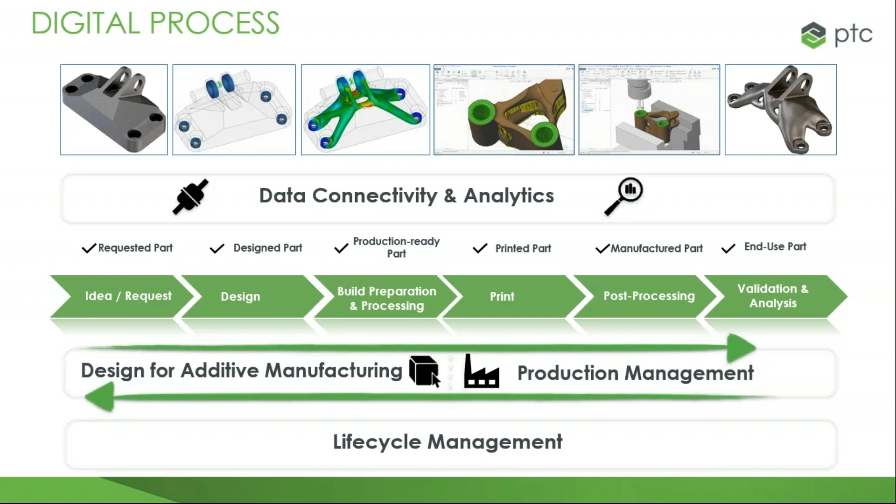Vores additive manufacturing proces, den vil vi gerne gribe og bære og holde hele vejen igennem. Og det går fra idé til design, til at lave forberedelse til printning, at man printer, at man postprocesserer, og at man analyserer og validerer de produkter, der kommer ud. Og PTC har en strategi, som siger, at alle 6 områder skal ligge i vores produktportefølje, og det er det, vi gerne vil have. Så når vi tager design og hele produktet, så vil vi kunne have hele lifecycle management og produktionen i vores systemer. Og der skal være datakonnektivitet frem og tilbage. Det er målet.

For at kunne understøtte det mål, så har vi selvfølgelig nogle produkter, og Creo kommer til at tage den generelle fremstilling af additive manufacturing produkterne. Vi kommer til at kunne lave en assembly tray, vi vil kunne lave topology optimization og generative design, og vi vil kunne lave en masse ribber, avancerede ribber. Vi vil kunne lave B-rep, præsentation af vores emner, altså rigtig geometri, som vi vil kunne printe.

Vores Windchill vil kunne tage vores print assembly, vores samling af det, der er på vores printplade, og kunne gemme det som en assembly, hvor der også er processeringsdata via vores Materialise samarbejde. Og så vil vi bruge ThingWorx til at overvåge produktionen med, og man vil kunne gennem ThingWorx få en forbindelse til de additive maskiner, der findes ude i produktionen, og kunne se, hvordan de kører. Og det vil man kunne lave dashboards på.

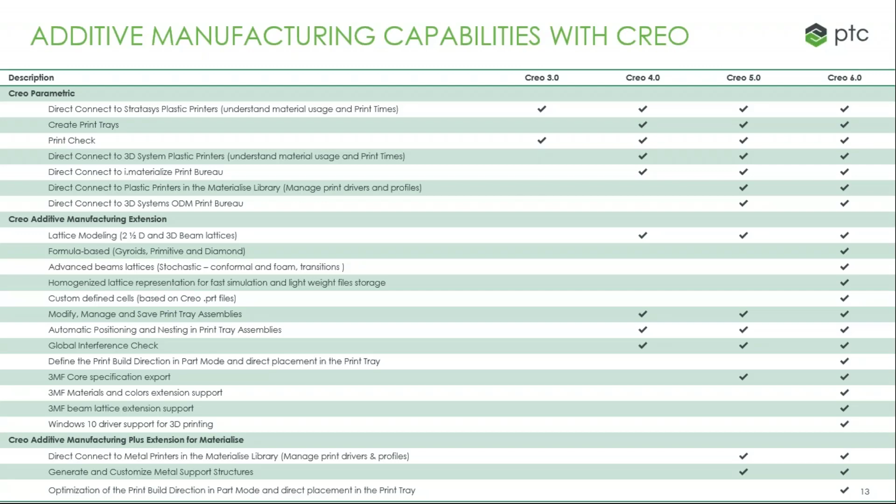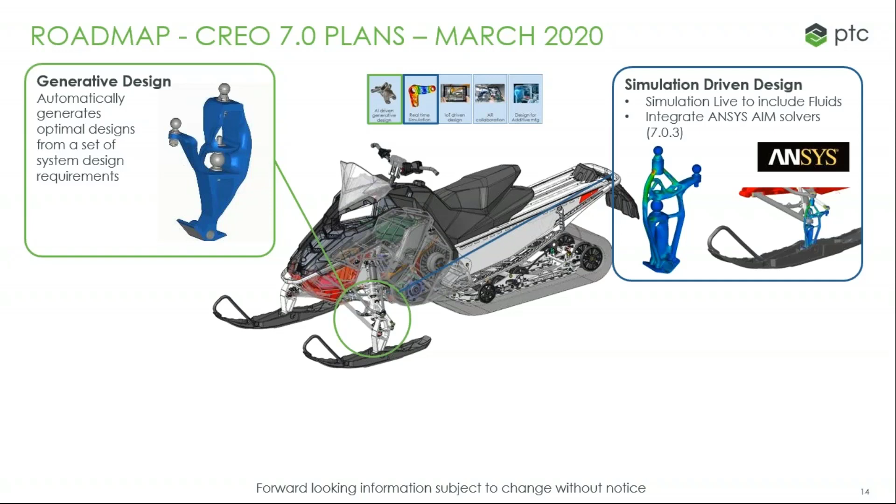Når vi kigger på, hvad der er og kommer i 7, så er et af de områder, som Additive Manufacturing også vil tage sig af, og som fundament, det er generative design, som sådan nogle muligheder for at printe nye ting, der ikke er ligesom de plejer at være, let og stærkere. Det er et af områderne, vi kan gøre meget ved.

Så har vi Additive Manufacturing som et af vores hovedområder i 7, og det sidste hovedområde, det er generel opdatering af Creo, hvor et af de hovedpunkter, vi skal lægge mærke til, det er multibody design.

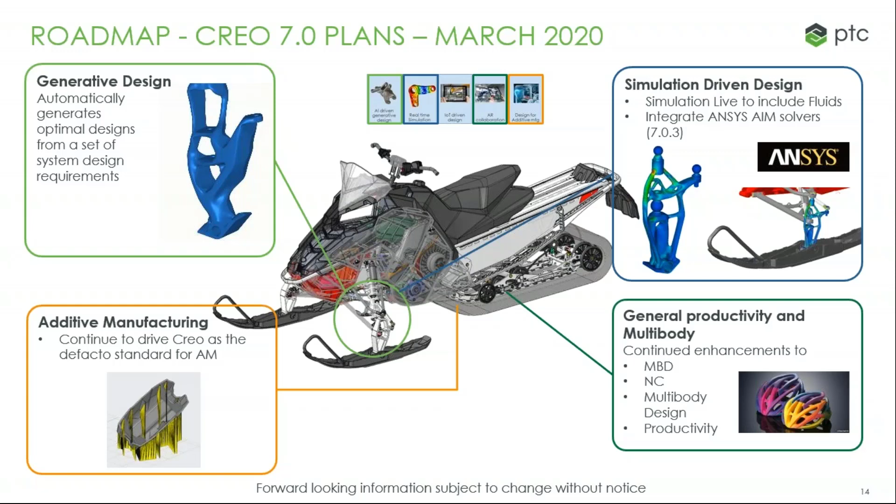Multibody design er vigtigt i vores print Additive Manufacturing sammenhæng, fordi vi i det har mulighed for at lægge flere emner sammen, og dermed printe dem som et. Vi har mulighed for, når vi har lagt emnerne sammen, at udhule dem og fylde dem op med ribber. Og det er et område, som også har krævet rigtig meget udviklingstid. At kunne tage 3, 4, 5 emner, smelte dem sammen, og så fra det punkt af køre videre med dem som et emne. Det har taget lidt tid.

Af de ting, der kommer i 7, havde jeg tænkt mig at fremhæve det her, og det er de stokastiske lattices, som nu er blevet optimeret således, at de genkender kanter på emnerne. Det er også et vigtigt område for at kunne printe 3D.

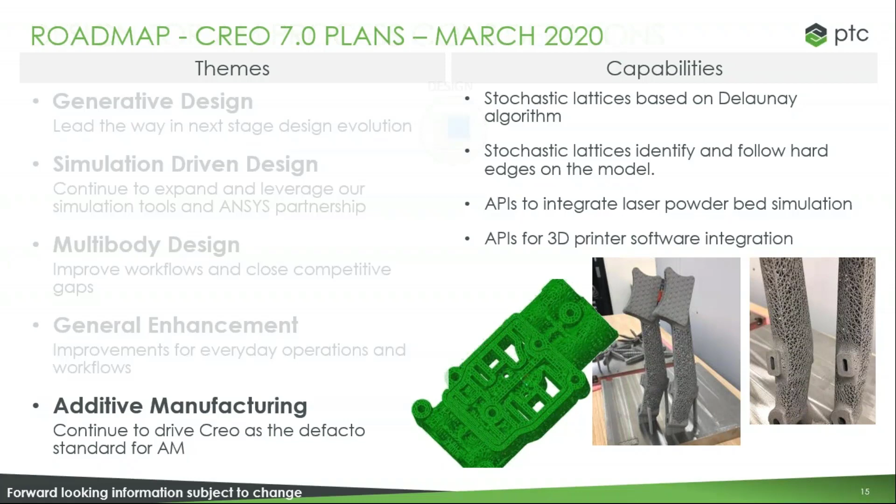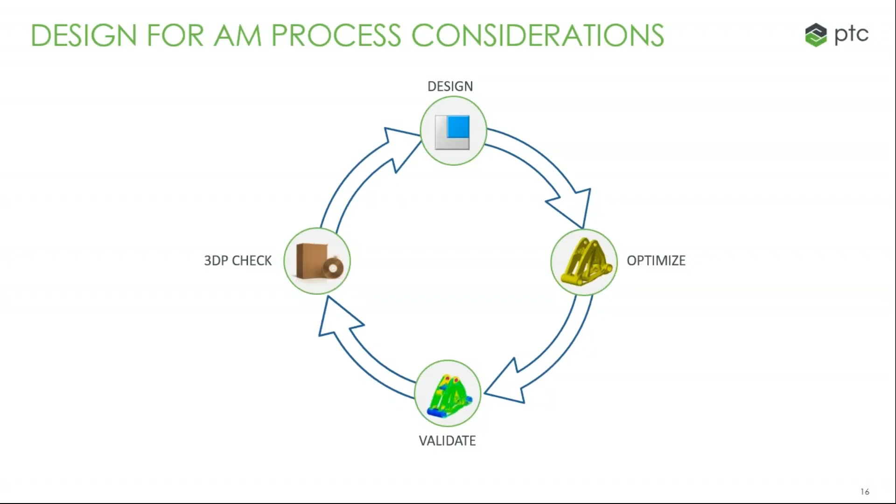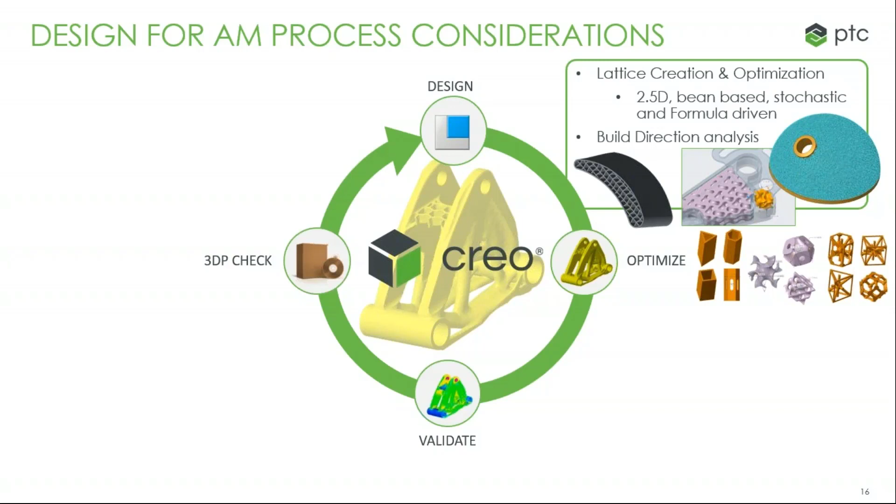Og til slut her, før min tid løber ud, så har man normalt skulle have 4 forskellige produkter inde i sit forløb for at kunne printe noget i sin 3D-printer. Det behøver man ikke mere, fordi vi har et produkt, og vi har Creo, som tager alle de 4 områder. Først og fremmest design med alle de interne afstivninger. Det kan være 3D, det kan være 2,5D, det kan være stokastisk, eller hvad det er. Det findes alle sammen i Creo.

Derudover så kan vi topology optimisere eller generative design optimisere vores produkter, også i Creo. Vi kan validere dem, vi kan placere dem på vores printing tray, og vi kan næste dem i vores printing tray. Vi kan lave, og det her det er vigtigt, vi kan lave en print tray assembly, som man kan store i Windchill, og så genkalde sådan, så man kan lave nøjagtigt den samme produkt en gang til, når man har printet det en gang.

Og så til slut, vi arbejder som sagt sammen med Materialise. Materialise har de fleste driver til de fleste 3D-printere, og det er derfor, vi har valgt dem som samarbejdspartner.

And with this, Paul, great. Are you ready? I'll make sure that Paul gets the presenting rights. Thank you, Michael. You were bang on time here. That's nice. I have a watch going so I could see how much time I spent. And Paul, you should be presenter by now.

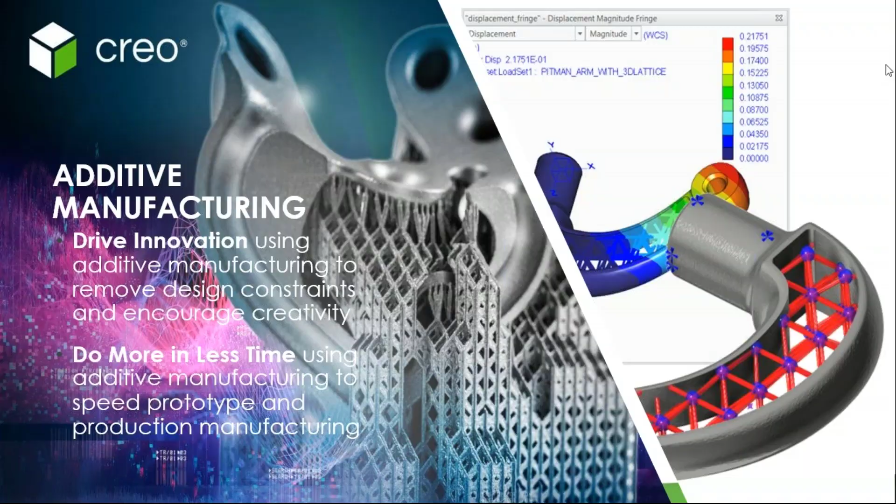So, can you see my screen? Yes, the floor is yours. Perfect. Let me just remove this. Okay, good.

I just saw that Michael talked a lot about Creo capabilities, but I'm going to add more information on top of that. So I want to talk about the tools that are available in Creo to address the challenges of additive manufacturing, and I will also talk a bit about generative design, what's coming in Creo 7. So this agenda will be divided into 4 sections.

I will start by talking quickly about the PTC strategy for additive manufacturing, and then I will talk about our ability to design lattice structures, typically used to lighten parts while maintaining a certain stiffness. And you will see that we can not only build these structures, but we can also simulate the behavior of these parts via structural calculation, modal, and thermal analysis, for example.

We'll also talk about print preparation and print connectivity with the Materialise integration. So we have a really strong connectivity with certain types of printers, with certain manufacturers. For example, we have a high-level conversation with these printers. We can print directly from Creo. We have information that comes directly from the printer, and we can leverage this.

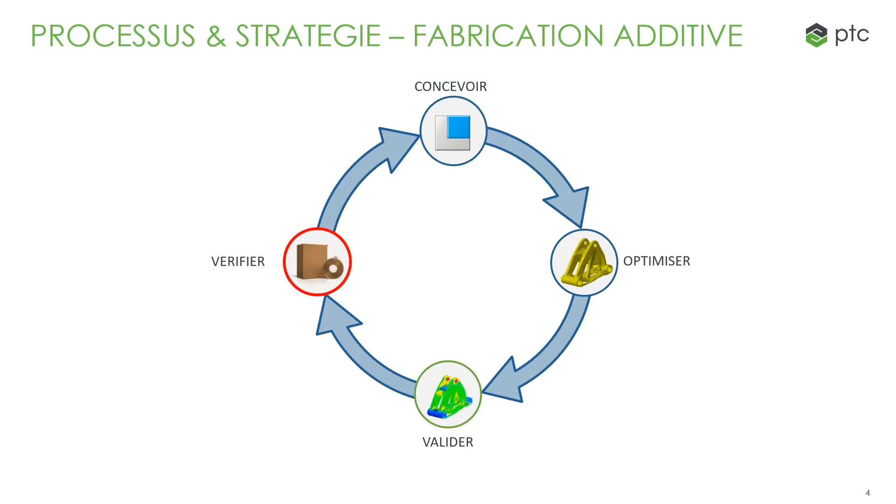So PTC's strategy is really to avoid this break in the digital chain by developing tools to optimize this process. The idea is really to enable you to design, to optimize, to validate, and to verify the printability of the models directly within Creo, without ever leaving your Creo session, and all this in an associative way.

So in terms of lattice modeling, we have libraries of predefined shapes. You can imagine, for example, a massive part like the one you can see on the right here, where you're going to define some areas that you are going to fill with lattices. The typical use case is to reduce the mass while keeping the part strong. And depending on how the part is loaded, you can choose different types of lattices.

Michael already talked about this, but you have 2.5D lattices, you have 3D lattices like the one you can see here. We are also supporting advanced lattices, like formula-driven lattices, which provide high stiffness and low maximum stress compared to other cell types. We have stochastic lattices, and you can even create your own lattices in Creo. So you really have flexibility here on how you want to define your designs.

And all this, and this is I think the most important point here, is B-rep geometry. So it's not faceted geometry, it's not approximated geometry. We have accurate mass properties, and this is really important. You just need a simple feature to create this parametric geometry. And you have the whole control here.

You can define any configuration that you want. You can say, for example, I want it to be hexagonal, I want it to be rectangular, I want it to be triangular, I want to change the cell size, I want to add a round radius, I want to add drain holes. You can really do whatever you want here. Same thing for the 3D lattices, you can say I want to remove inner horizontal beams, inner vertical beams. So you can really play with this and investigate many different ideas really quickly.

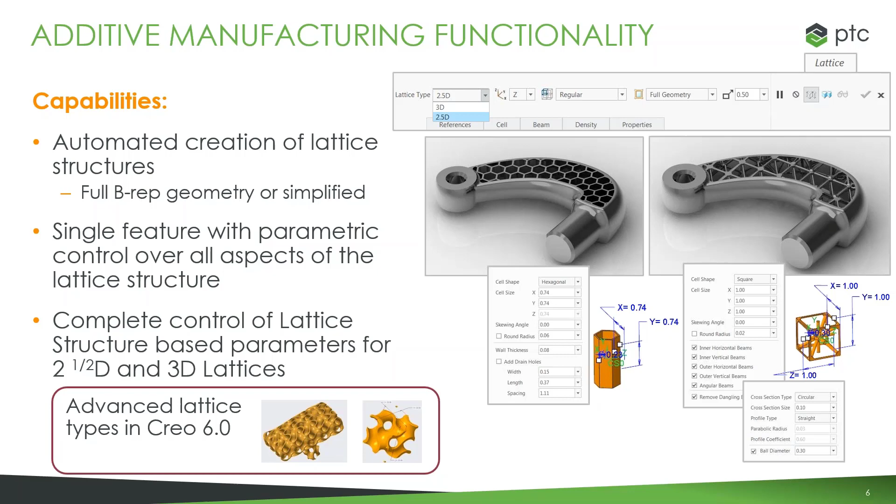And it's not mentioned in the slide, but of course, as this cell is parametric, you can use these parameters as optimization variables. So you can optimize this part. You can say, for example, I want to take this part, reduce the stress, define the maximum displacement of a certain value, avoid certain frequencies, and my goal is to reduce the mass. And you're going to use another tool that we have, called BMX, Behavioral Modeling Extension, and it will take all this information and find you the best possible result, meeting all your design requirements, and of course reducing the mass, for example.

So that's really good to be able to create these lattices, but it's even more important to calculate those. And there is a lot of tools in Creo to do that. We have Creo Simulate, which is our historical simulation tool. We have Creo Simulation Live that can also do the job, which is a new tool. We'll see that in a moment in the demonstration.

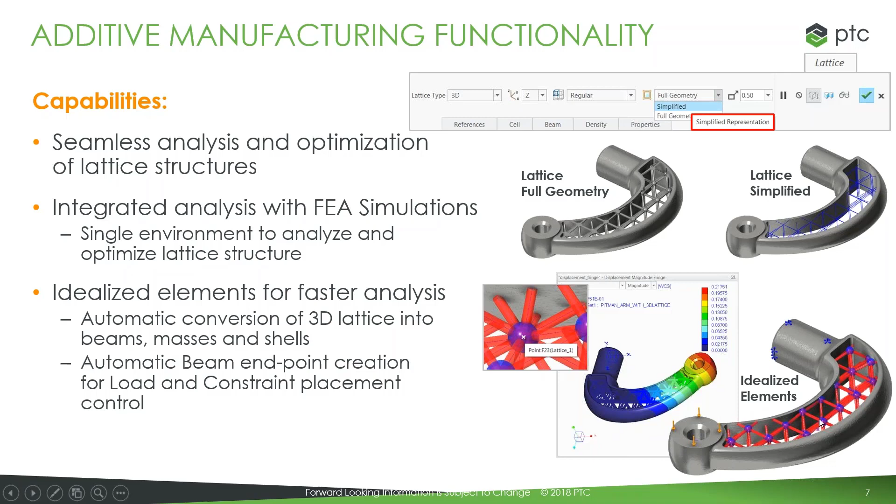The point is that even on dense lattices that you cannot represent in direct geometry or exact geometry, for the sake of precision or for the sake of performance, you're still able to do simulation thanks to the idealization capabilities, what you can see on the bottom, that are integrated into Creo. So you can basically simulate any type of lattices that you want.

We provide functionality to enable printer tray optimization. In Creo, we have a specific type of assembly that enables you to position components either manually or automatically, or to do what we call nesting, which automatically configures the component placement to best utilize the tray volume and maximize printing efficiency. All the information you need to print - the models, the assembly, rotations, materials, colors, and so on - is stored in this assembly, and you can reuse it to make your process repeatable for final production parts.

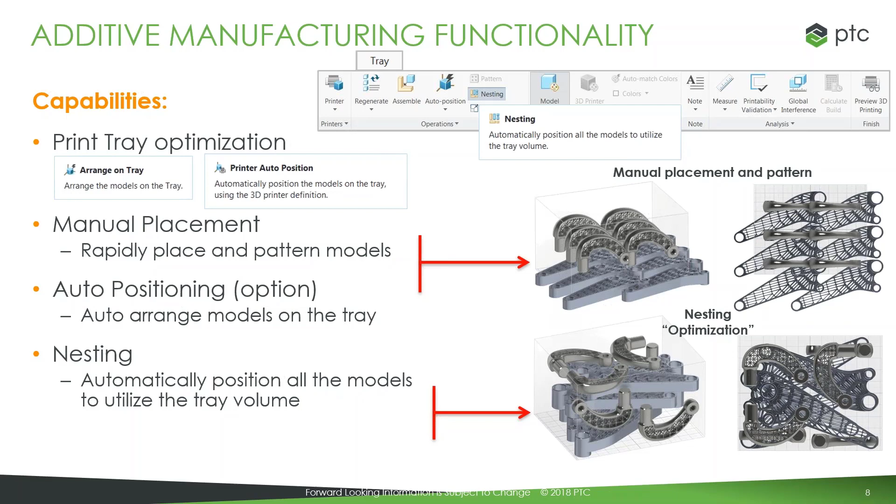You already saw this just before, but in Creo 6 we introduced a new type of analysis called the build direction analysis. What it does, as you can see, is identify via a color code all the areas that will need support according to the critical angles you've defined, based on your machine.

Not only can the system display these support areas, but you're also able to optimize the orientation of the part, for example to minimize the support, minimize the print time, or even maximize the capacity of a print tray. You have all these options here. And of course, the result of the analysis is a new orientation of the part that will automatically be used in the print tray at the end to position your components.

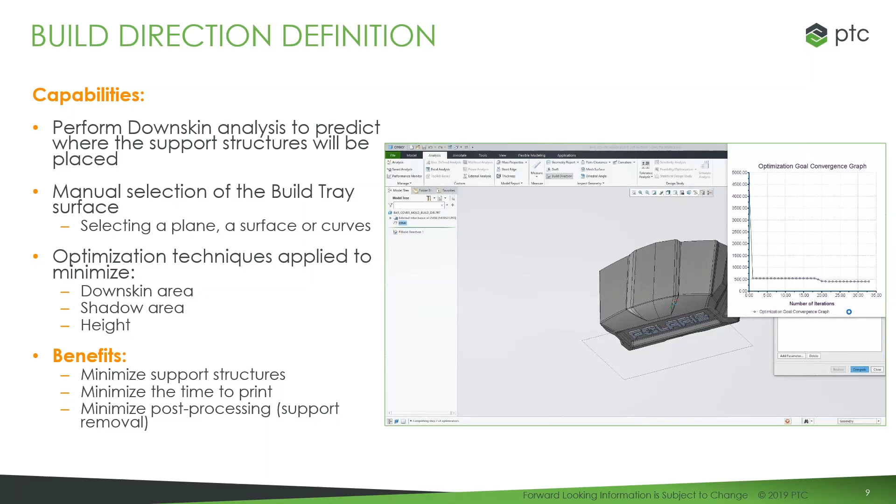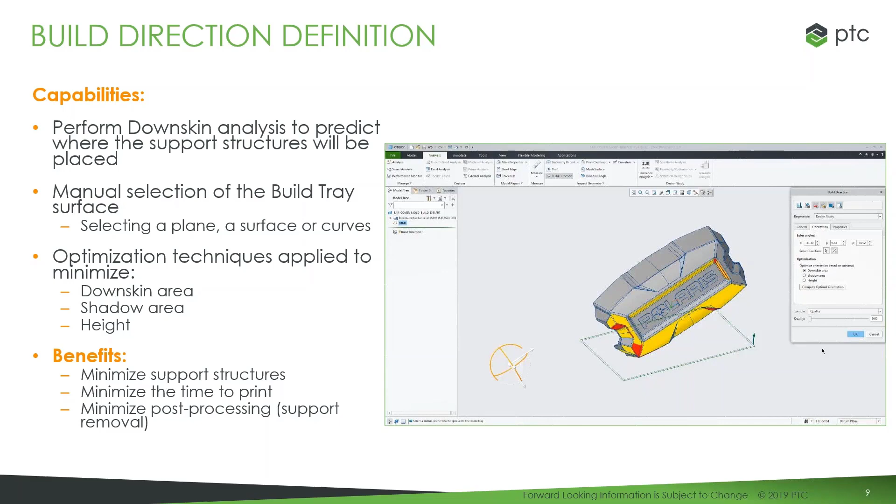Right now you can see the system iterating until it finds the optimized orientation. When you close that, you can see the orientation it finds is the best orientation to minimize the support in this case. And you can reuse this later on in the tray assembly.

So let's talk about the Materialise integration quickly. We have a partnership with Materialise. For those who don't know, Materialise has been around for a while and developed a lot of functionality specific for metal printing. They have a lot of experience, and we basically brought this experience into Creo, into two components.

The first is called the Build Processor Framework, which is a connective feature to connect Creo with machines, the metal printers for example. It's really similar to what we have in Windows: the Build Processor Framework is the printer manager, but there's no printer driver by default - you need to get a printer driver if you want to print directly from Creo.

This connectivity feature enables you to extend your connectivity to more than 70% of the printers in the market, so you can basically connect to any printer in the market. We have a list we can provide at the end of the presentation.

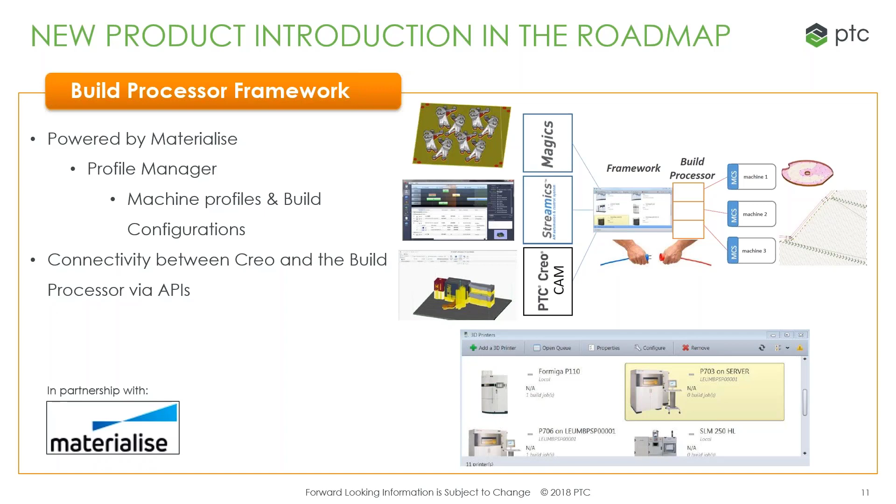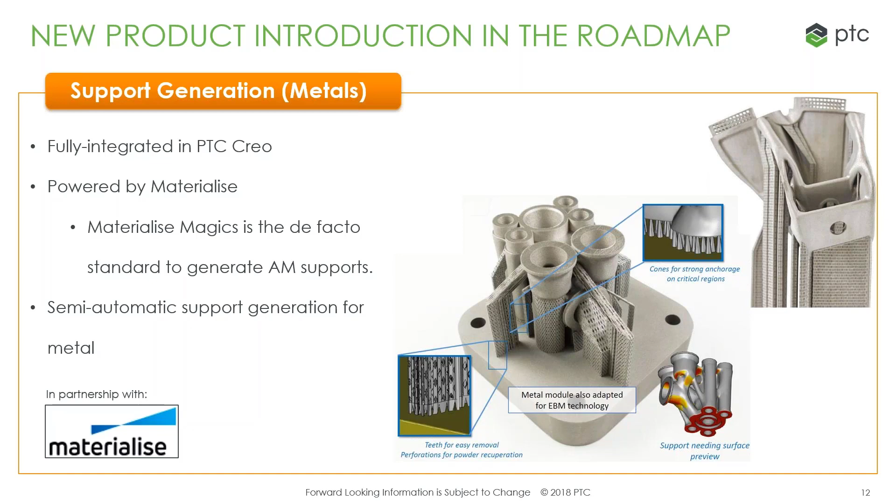The second component we brought into Creo is what we call the Magics SG Plus kernel. Today it's the leading tool in the market for generating support structures, and it enables you to generate the exact geometry of a support according to the printer you've chosen. We have total associativity between the support and the part, so if your part changes, or the position of your part in the tray changes, it will automatically regenerate.

Continuing on connectivity, in Creo 5 we introduced support for 3MF export to the printer, which is becoming the industry standard for communicating models to printers. In Creo 5, we simply supported sending the global data. In Creo 6, we extended that - we now have the ability to send the material information, the color information, and the lattice structure information.

This is really important, and it was requested by a lot of customers, because if you create a model with hundreds of thousands of beams and want to send this to a printer, you get a very large file - in some cases too large to send, and it's not supported. So the ability to send the lattice definition to the printer greatly reduces the amount of information you need to communicate to the printer.

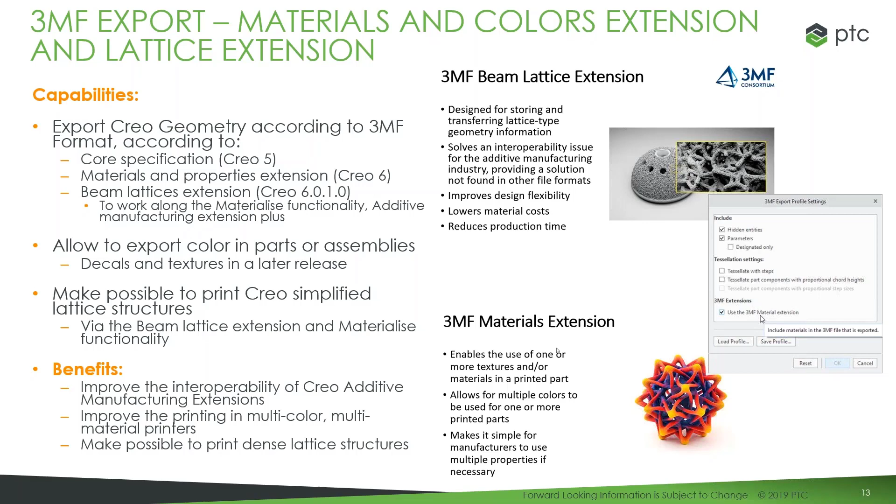Another thing I want to talk about is slicing. 3D printing is obviously layer by layer printing, so what we've added in Creo is the ability to not only visualize the slicing process, so you can understand where you're going to have problems with the printing, but also to directly take each of these slices and export them in what we call the CLI format, which is the universal standard format for sending slices directly to printers.

Metal printers, it's accepted by the main 3D printers in the market, so these printers can directly consume this information. The goal is exactly the same as with 3MF: to simplify the total amount of data that you want to transfer to a printer at the end of the day.

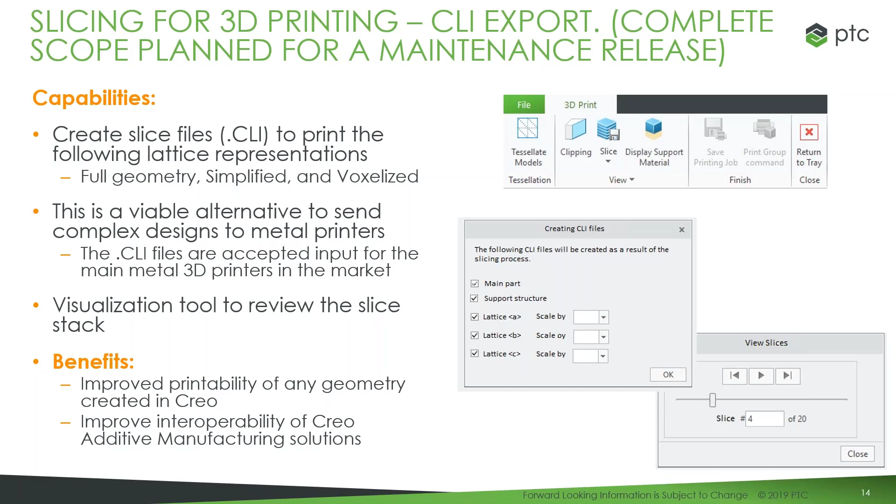So let me jump into the Creo generative topology optimization, and then we'll have a short demo on this. Generative topology optimization is a technology that will automatically generate the best, optimal designs from a set of design requirements. You are able to specify functional requirements, the objectives you want, the materials, and most importantly, you are able to define the manufacturing processes you want to use.

This is taken into account, and the system will generate the best optimized design for this specific manufacturing method. So let's talk a bit about strategy for Creo 7. When we talk about the strategy, we look at it in two ways: what is going to be available in Creo, and the solution that will be available in the cloud. When we talk about Creo specifically, we talk about Creo generative topology optimization, and it's really going to be a journey within Creo where you start by defining the initial geometry, the design spaces, the physics, the loads, the constraints, your goals, the materials, and the manufacturing constraints.

Once you've defined that, you are able to perform your optimization. Then, more importantly, you can take advantage of the geometry reconstruction that we have into Creo. That was introduced in Creo 5 and 6, but now the quality has been improved a lot with a tighter alignment with the resulting geometry. So you reconstruct your product, and then you can do whatever you want. You can bring that into Creo Simulation Live, or perform downstream manufacturing methods and so forth. The point is that once it's defined as a B-rep geometry, anything downstream that you want to do as any traditional Creo, you can do that.

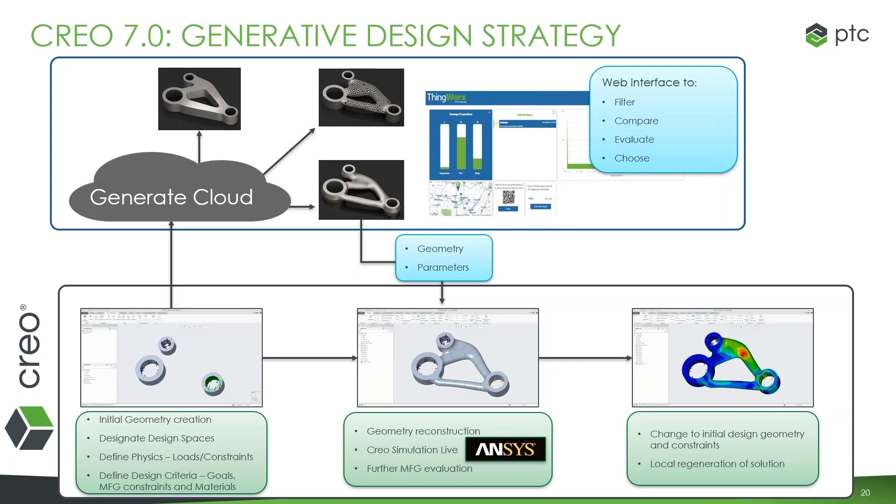Okay, so let me add some more information on topology optimization. We can all agree that when you run an optimization, the only thing that you can do with it is 3D print it, most of the time. But maybe you don't have a 3D printer. Maybe you just have traditional methods - milling, forging, casting - and you want to leverage the result of the optimization with those specific manufacturing methods. For me, that's really the value that this solution is providing. It allows you to optimize based upon these manufacturing methods.

Okay, so it takes natively from the beginning this information into account and creates the part that you will be able to manufacture the way you want. So when we talk about what it delivers, we talk about the speed, because we are able to quickly optimize and yield the result based on the technology of Frustum.

It's really easy to use. So you will see that in the demonstration. You can easily set up criteria, review the results, and reconstruct the geometry. It's manufacturing ready. As I said, it's getting you really close to being able to produce this part from the result that is generated by enabling this manufacturing constraint.

You can define a pull direction, you can define draft plane, you can define a linear extrusion, and these are really the ingredients that will help yield if you're going to mill it, to forge it, to cast it, and so forth. And it's interactive. You get a result, and it's not the end of the day, so you can change it. You have the ability to really interact with this product.

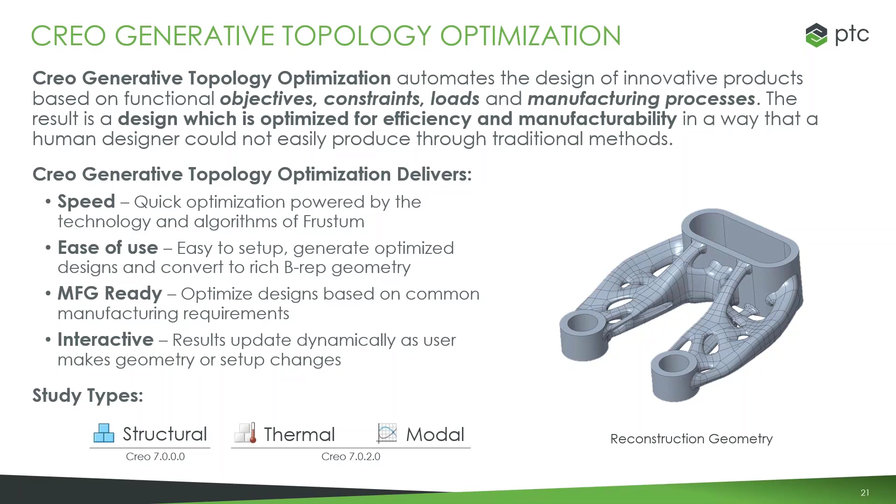So to finish, in 7.000, we will only support structural analysis. And then in the second release, we'll provide thermal and modal. We'll support also thermal and modal analysis. Okay, so let me jump into the demonstration.

I'm just opening Creo. I will start by talking about additive manufacturing. Let me just, I think it's already defined. Perfect. Let me just open a model. Okay, perfect. I like to work this way. Perfect. So this is a bracket, a really simple bracket, as you can tell, just to show you some basic capabilities of additive manufacturing.

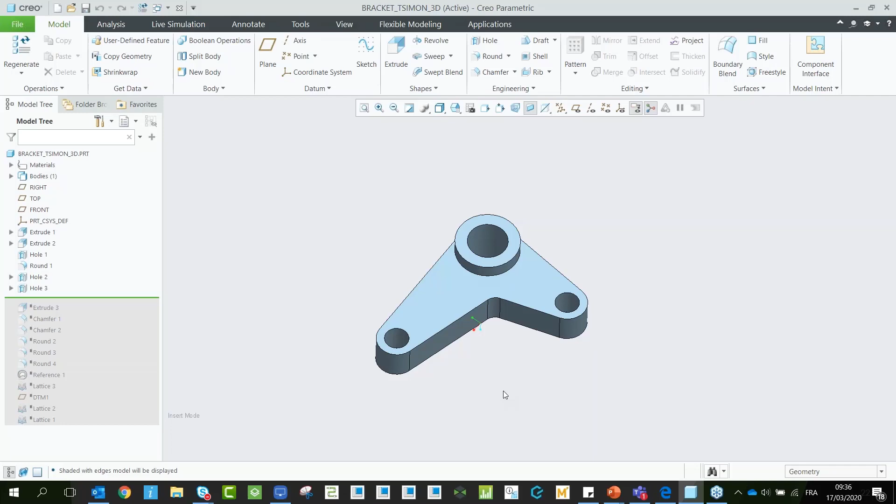So with a bracket, this bracket is too heavy. I want to remove some materials. I'm not okay with what I have right now, but I want to control the deformation. I don't want this part to deform too much. That's my main concern.

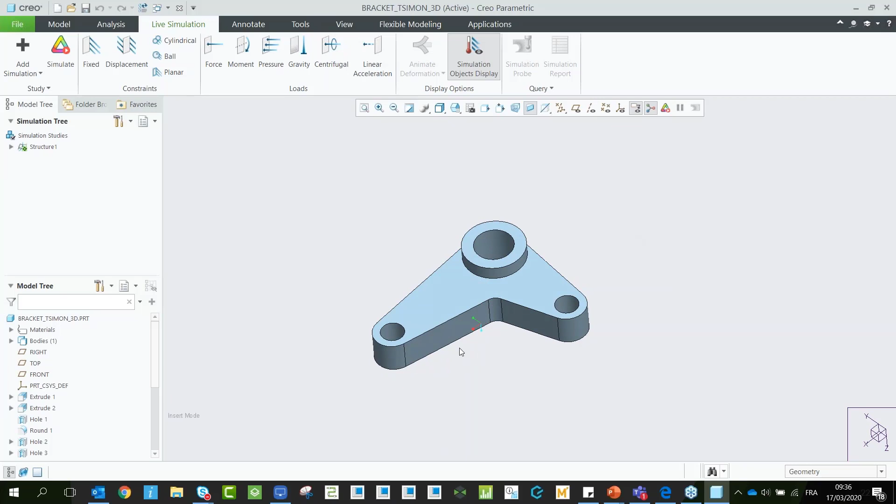So what I'm going to do, before starting to make some modifications, I'm going to go to live simulation. I think Michael already talked about this tool that enables you to guide you when you're designing and gives you instant result, instant simulation result. So I'm just going to define some analysis, just simple analysis, a structural analysis. As you can tell, we have many different analysis types, so thermal, modal, and also fluid since Creo 7. Let's start with a structural one.

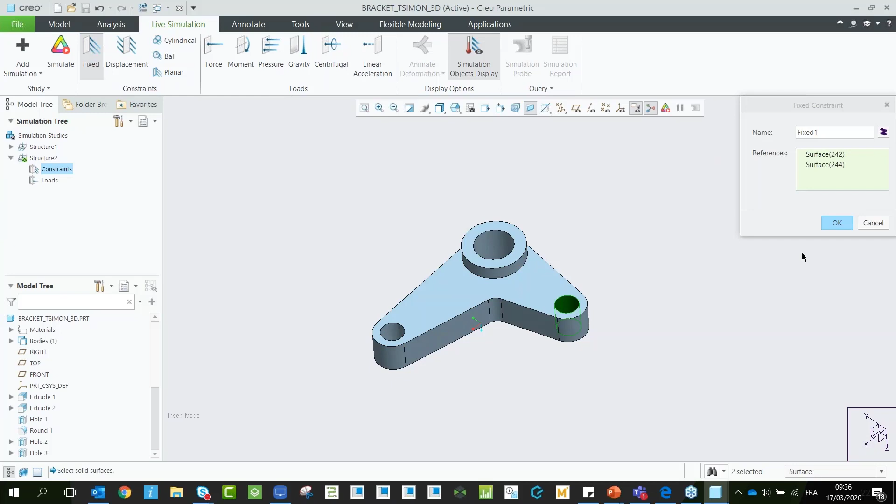I'm just going to define my constraints and my loads. So constraints, I will, for example, fix this one, fix these surfaces. I will add a pin here. Let's say this is a fixed pin. And I'm going to add some loads here on these surfaces. So let's say minus 10,000 and 5,000. Okay, validated. So I have my boundary condition defined.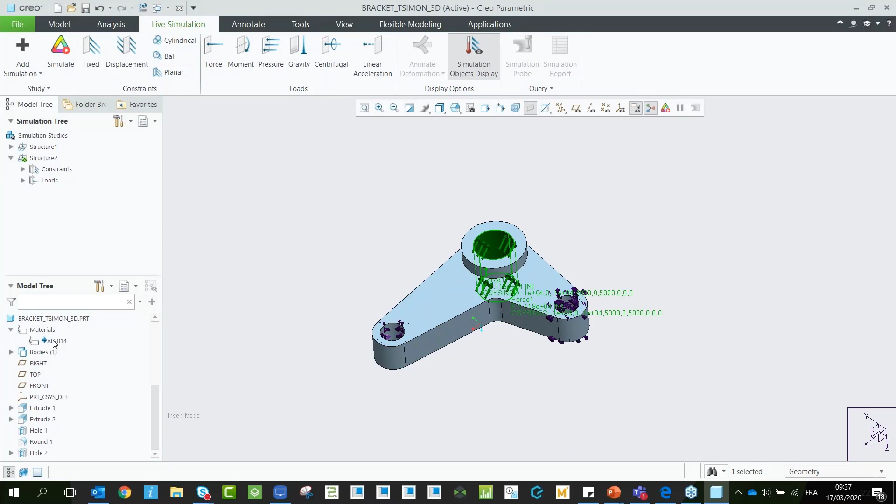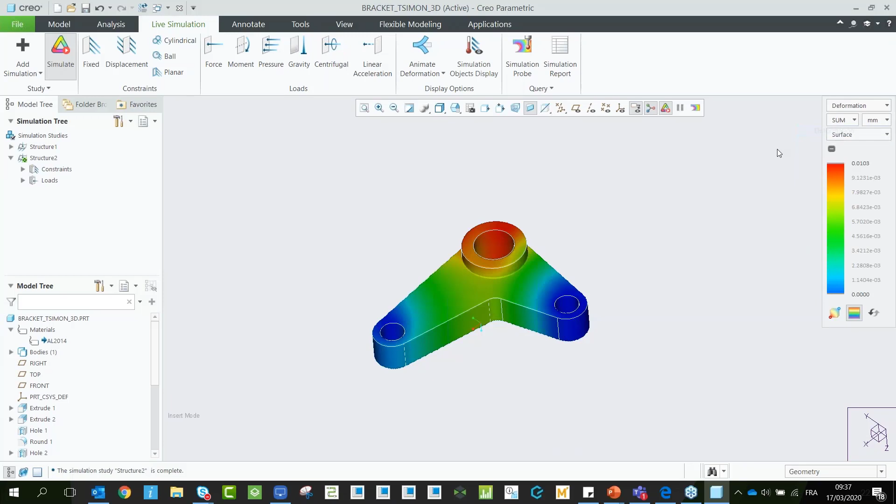I just need to define my material. It's already applied, perfect. So now I can just simulate this. Let's wait for 2 seconds, 3 seconds, and boom, I have my results. I can directly see, okay, I have this in front of my, let me remove. So I can see my von Mises stresses. Of course, you can see your deformation, you can animate this. My main concern is deformation, so I will just stay on deformation. I can see that I have 0.01 millimeter deformation. That's okay, but I need to remove some material.

So let me just start making some changes. As you can see, I already defined some features here in my model tree. So let's create a cavity. I'm creating my cavity. Boom, I have my new results. So it's producing a new result. And what's going on here is that Creo Simulation Live is running in the background constantly and just providing me my results when I need it.

Okay, so I can see that, of course, my deformation is a lot bigger, and I don't want this. I want to reduce this. Of course, my material is okay, but I want to reduce the deformation. So what I could do is, for example, add a rib, add some chamfers, some rounds. So let me just add some chamfers, rounds here. As you can see, I added those. Okay, I reduced it by a bit, but it's not enough.

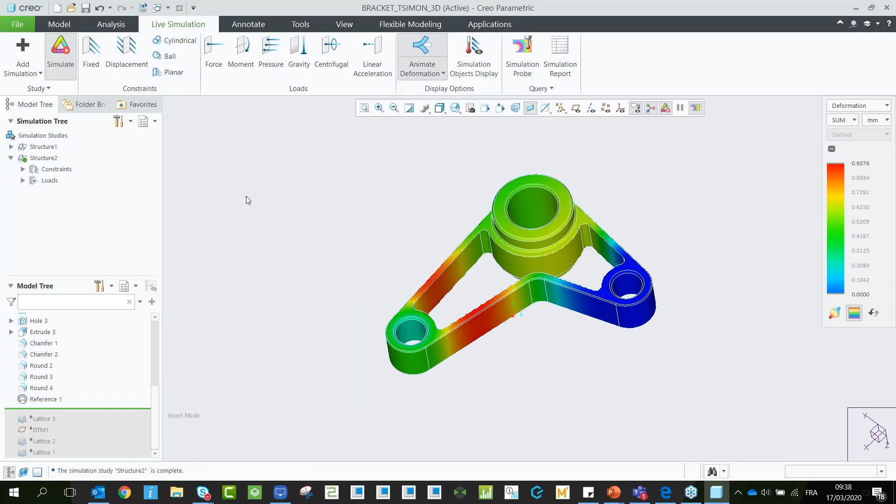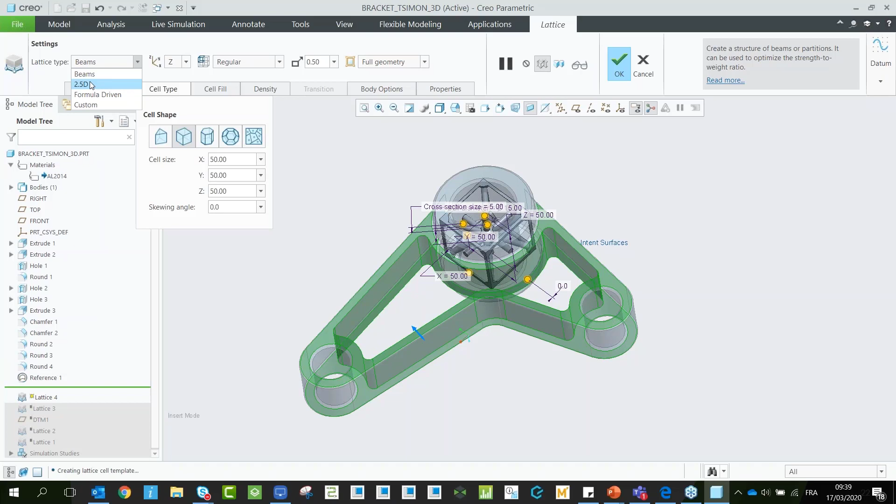Okay, so let me start creating some lattice geometry inside. Of course, you can do anything, but in this case, I want to show you the lattice capability. So I'm going to select the references. I want to propagate my lattices inside, and then start defining the type of lattices I want to use. So in my case, I would start by 2.5D lattices. Let's say I want it to be square. Of course, you can say triangular, octagonal.

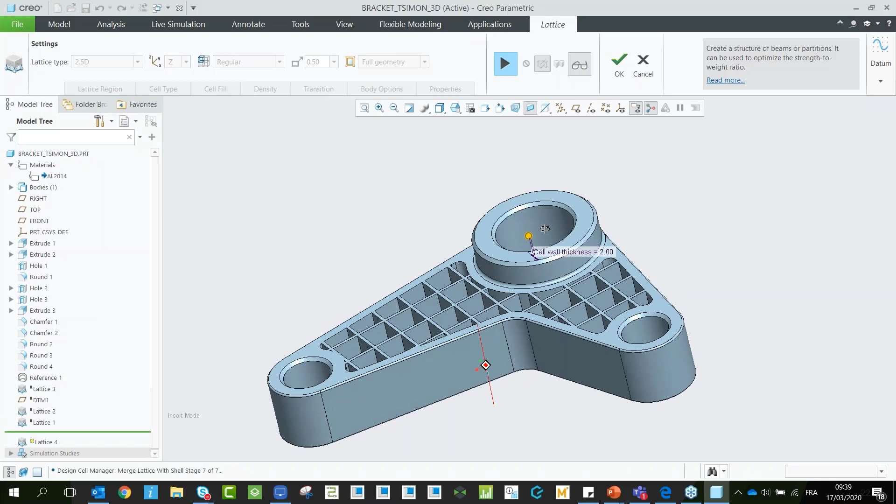Let's say square to start, let's say 20. You can define a wall thickness, so we'll define the wall thickness of 2, and let's validate this to see how it behaves, what it looks like. If I validate this, of course, same principle, I will get my new results.

I've reduced my deformation by a lot, so that could be an option. But I want to try different alternatives, so let me just come back here and say, instead of rectangular, maybe I want hexagonal.

Let's say 30 this time, a bit bigger. Let's add a wall thickness of 3, maybe. I can add some round radius, let's say 1 - you can see the round radius here. I can add some drain holes.

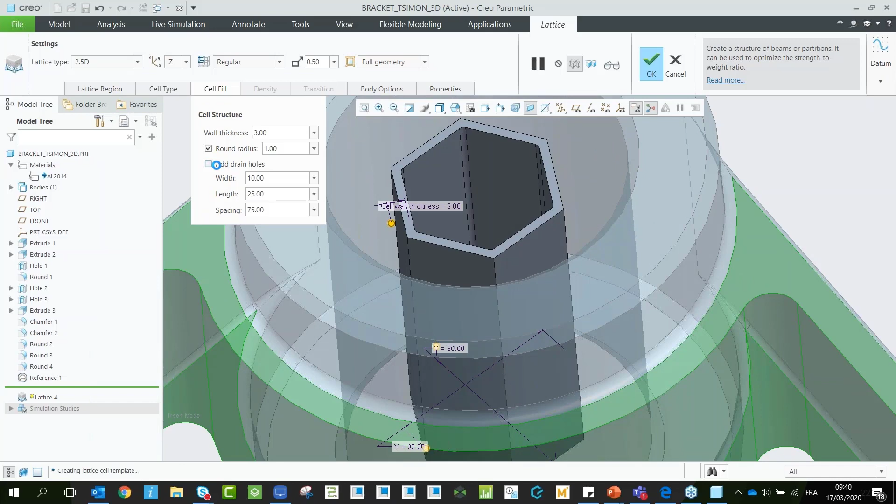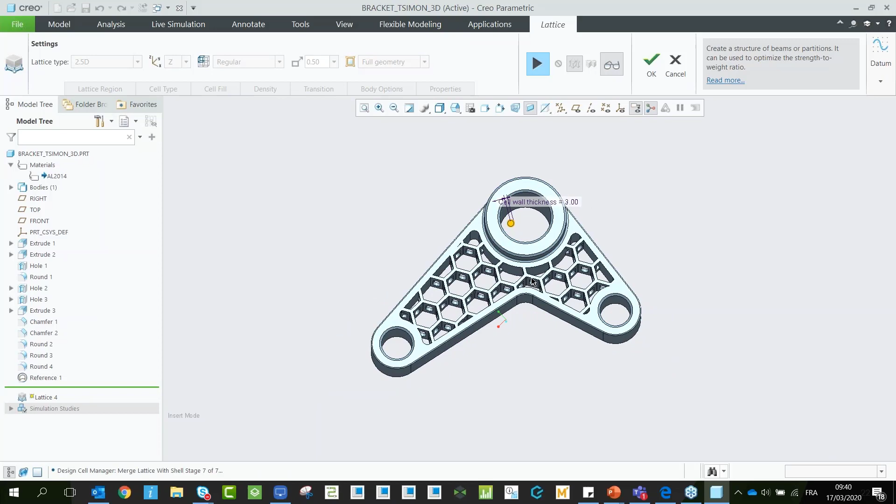Maybe you're using powder-based manufacturing methods, a 3D printer, so maybe you need to remove this powder after the printing. That could be helpful with this drain hole. So let's define this - let's say 15, perfect, and let's preview this. Okay, and here I have my new result. Same thing, if I validate this, I will get my new results. And boom, so I have my new results.

That's okay, so let's try another type of lattices now. Maybe I want to remove this one.

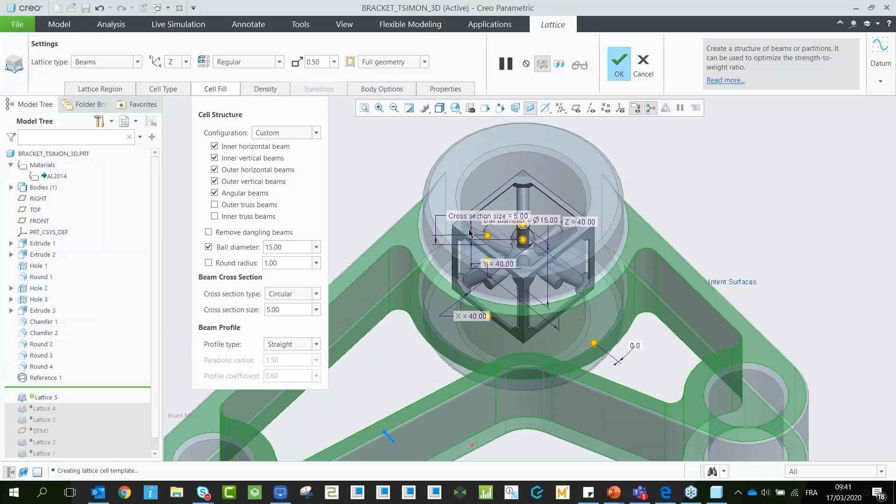Let's try 3D lattices - same thing, I'm selecting my references. This time I would say 40. Of course, you can play with the handles directly in the graphic area, but in my case I will just do this. Okay, let's say square, that's okay. And as I said, you can play with the checkboxes here, so you can say I want to remove my inner horizontal beams, for example, the inner vertical beams. You can really do whatever you want here. I will remove my dangling beams.

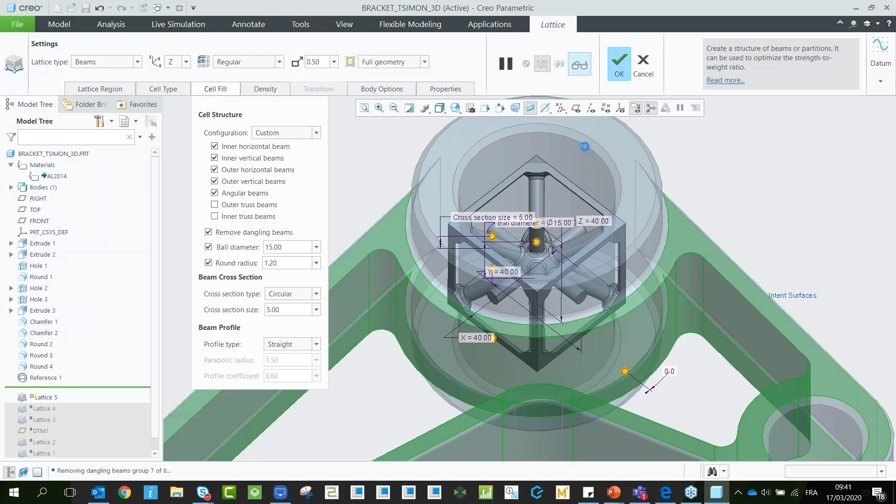I can define a ball diameter, round radius, and so on. So let's define a round radius - let's say I want it a bit bigger. You can play with the cross-section type and so on, so you have many different options. And then you can just validate this - I have my new results.

Of course, you can densify this - you can say I want 0.8, for example, densify this. And now we have a new result. That's better in terms of deformation.

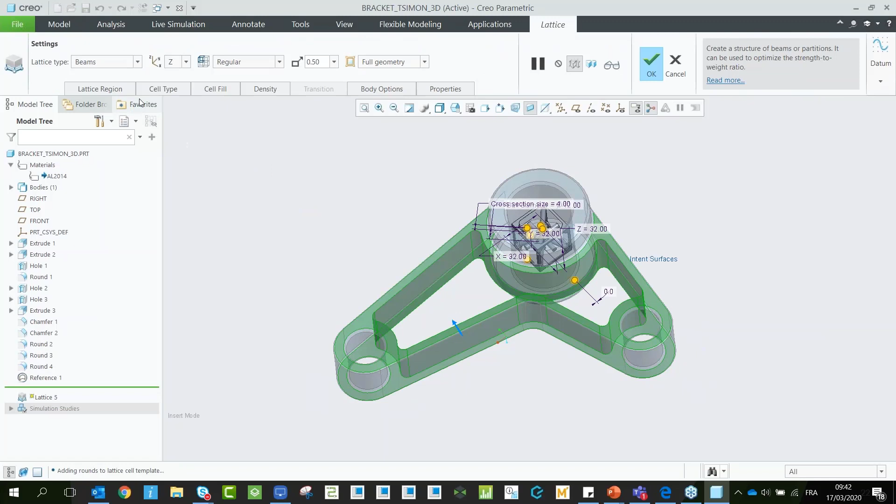Let's try to finish on lattices - let's try another type of lattices type. We have the formula-driven lattice type - let's go here. These lattice types have the unique characteristic of being not only really strong, but also self-supporting, and that's really important in terms of additive manufacturing, because you don't need to add support when it's printing.

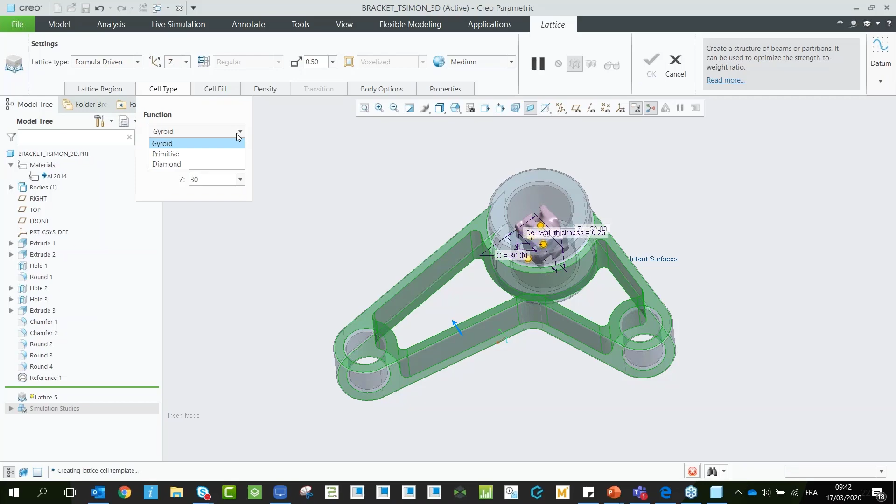So you will reduce by a lot the post-operation needed to remove the support at the end of the printing. Okay, so let me define here, for example, 30, 30, 30. Of course you can say this is Gyroid, but you have many different options.

So you can say primitive, you have also diamond if you want. Let's say Gyroid in this case, and let's define a thickness of 3. Now I can define the quality and validate this.

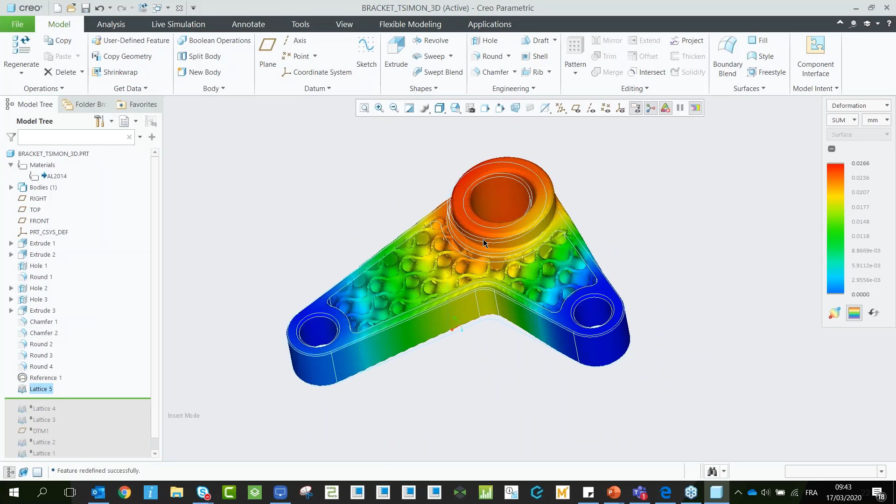Okay, and all these shapes are really B-rep geometry, so you can do an optimization with this. You can say I want to play with the thickness of these lattices to get my best result possible, to reduce the mass, to remove some frequencies. You can really do whatever you want because it's B-rep geometry, and then you can reconstruct this.

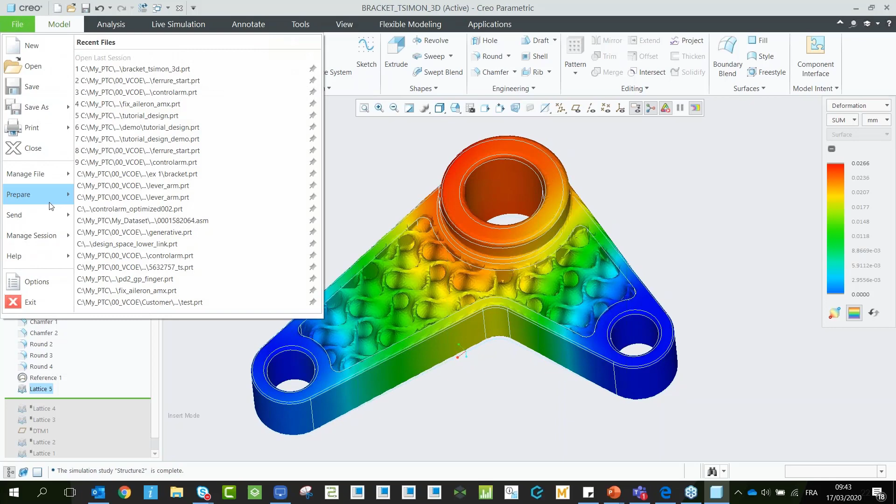Let me jump into showing you just a bit before how you can, for example, print that. You can prepare for 3D printing here. You can just arrange on tray. As I said before, you can previously do an analysis, an optimization that tells you the build direction, the optimal build direction according to your needs.

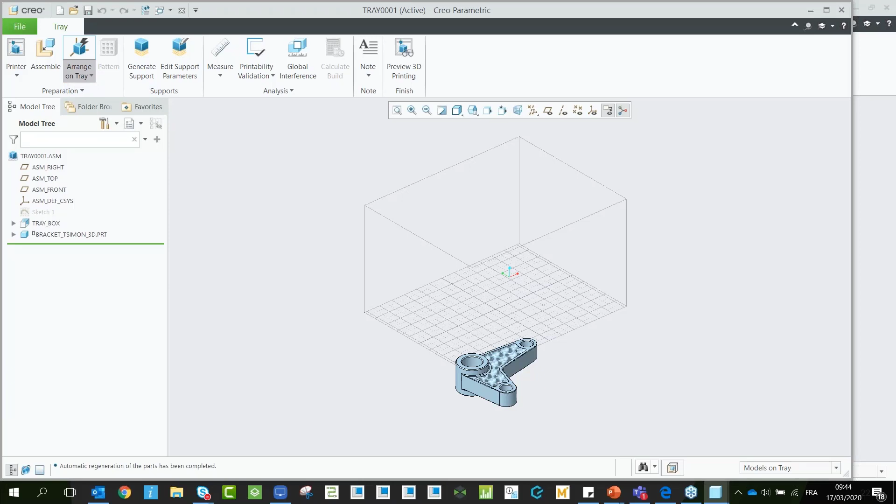So if you want to have less support, if you want to have shorter printing time, you can define this, and then you can say I want to arrange this on tray, taking into account my build direction. We'll just arrange this on the tray with the perfect optimization, the orientation that you define. So if I arrange this on the tray here, now I have this on my tray.

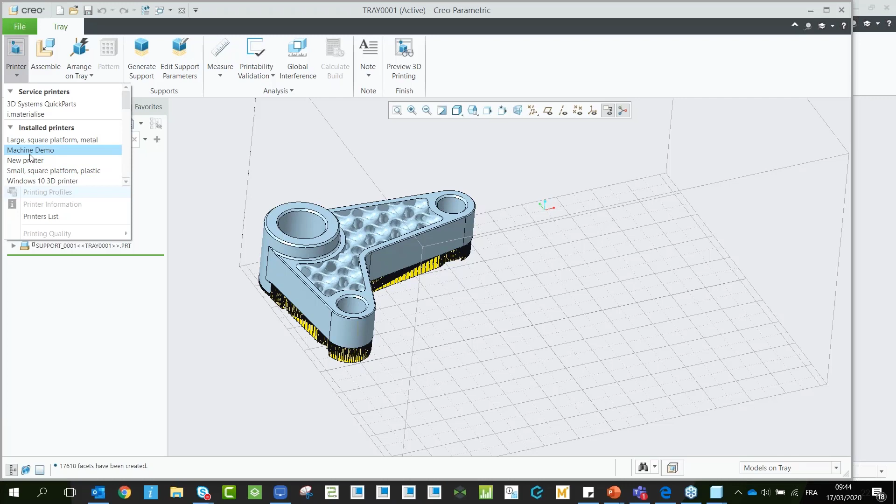I can generate my support, and that's as easy as that. So now you have a support. If you go to printer, of course you can have as many printers as you want, so if you have the printer drivers, you can add your printers here. If I change the printer, of course this support structure will change and update accordingly.

I think we have a question here about supports, which might be relevant at this point in time. It comes from Stefan at Danfoss: how do you make sure that you always have the newest technology available for supports?

Apparently the newest knowledge around support generation should update - a lot of things are happening. For each release, so if you have Creo 7, it's not Creo 7 M010 and then Creo 7 M020, for each release we make sure that everything is updated. We are bringing into Creo the Materialise capabilities, each time bringing the updates of their expertise. So for each release, you will be sure that everything is updated and up to date. I hope I answered the question.

I think that's a good answer, and it should answer the question. So I hope Stefan agrees. But otherwise, you'll have to ask again.

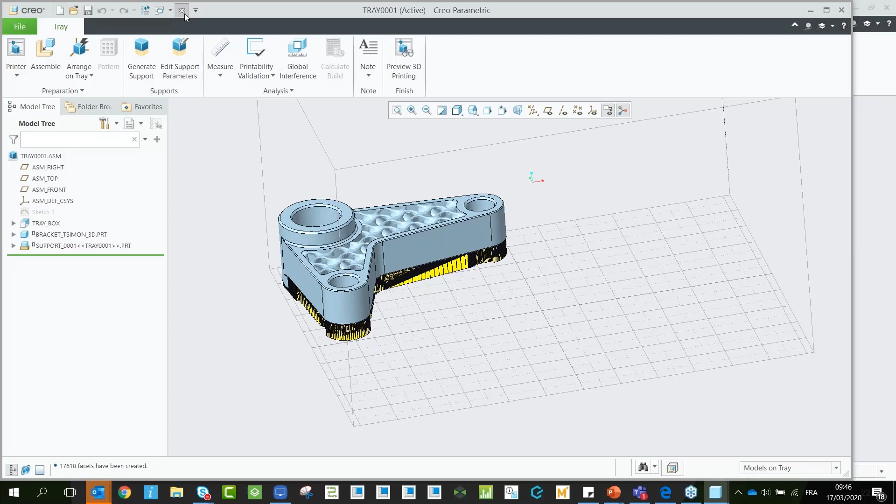Let me just finish this presentation with generative topology optimization really quickly. You will see it's really simple to define an optimization. So let me just open a new model.

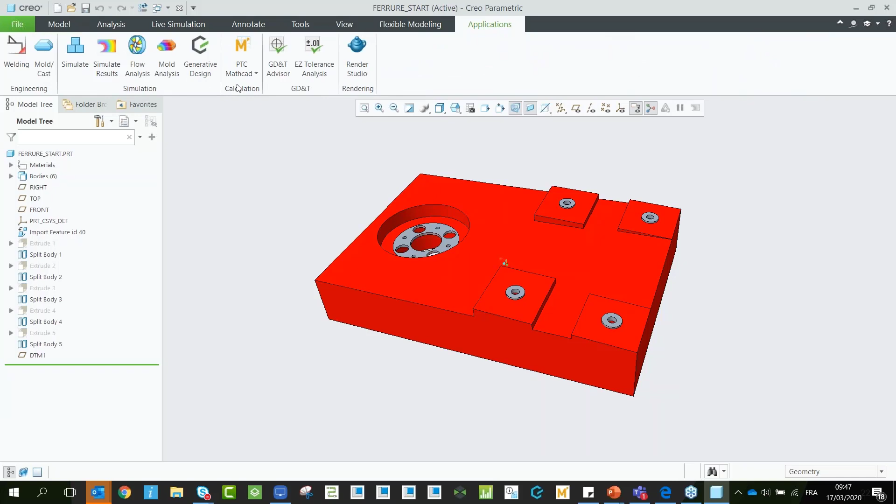What you can see in red is our design space - the geometry, the volume that I want the system to play with. And I don't want the system to play with some other geometry, which will be my preserved geometry in generative design. So I'm just telling the system, I want you to play with some geometry, and I want you to keep some geometry that will be fixed.

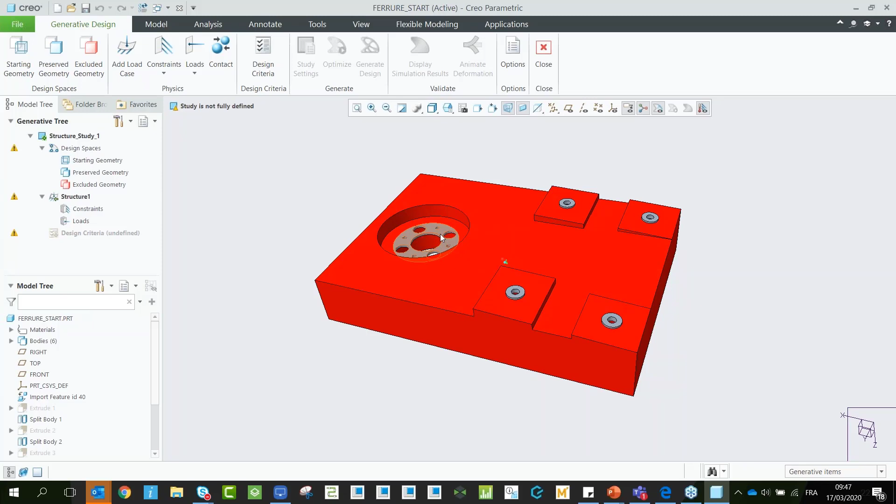In this case, the objective is to design a part that is attached to these 4 mounting points here, and that connects to the central part here, where there is an equipment attached. So in this case, it's a camera, really heavy. So I want to design this part, and I want the system to design it for me.

I'm just going to define my studies - my constraints, my loads, my starting geometry, my preserved geometry - and it's going to do it for me. As you can see, it's really easy to follow the process. It's telling me exactly what I need to do to run my optimizations.

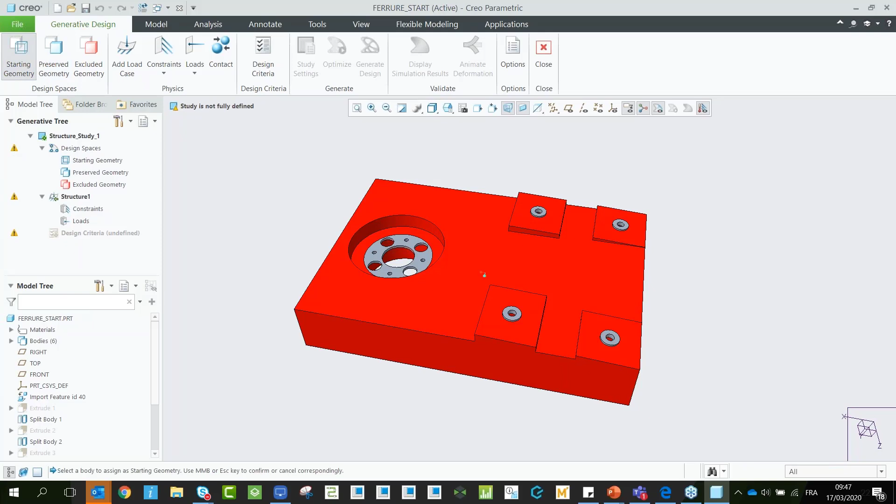First thing, I will define my starting geometry. Let's go and define this as my starting geometry. It turns transparent, so it's understood by the system that it is my starting geometry. I define my preserved geometry here, so I can go here and just select those.

Perfect, validated. I just forgot one - of course, this is a preserved geometry. And when it turns blue, it means it's understood by the system as a preserved geometry.

Each time you do something, it's stored in the model tree, so you have all these bodies. Michael talked about bodies - now in Creo 7, we support bodies, and that enables a lot of flexibility now in Creo design. It's one of the biggest improvements in Creo 7.

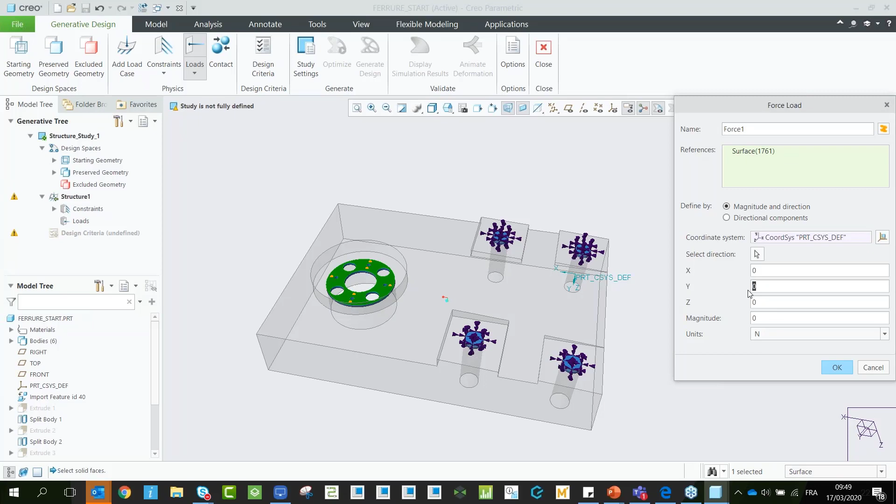So let's define now the structure, the constraints and the loads. My constraints will be - I want to fix the surfaces, I don't want them to move. And now I want to define my load, which will be just the weight of a camera, about 1,000 Newton. So I define my load, and that's it.

So I've defined almost everything. Now it's asking me for the design criteria, so I can start defining my goals, my constraints, my materials, and so on. For now, in Creo 7, we only have the possibility to say I want to make my part stronger with a limited volume - for example, keeping just 30% of the mass, the total mass of this part. That's the only goal we can define right now in Creo 7.000.

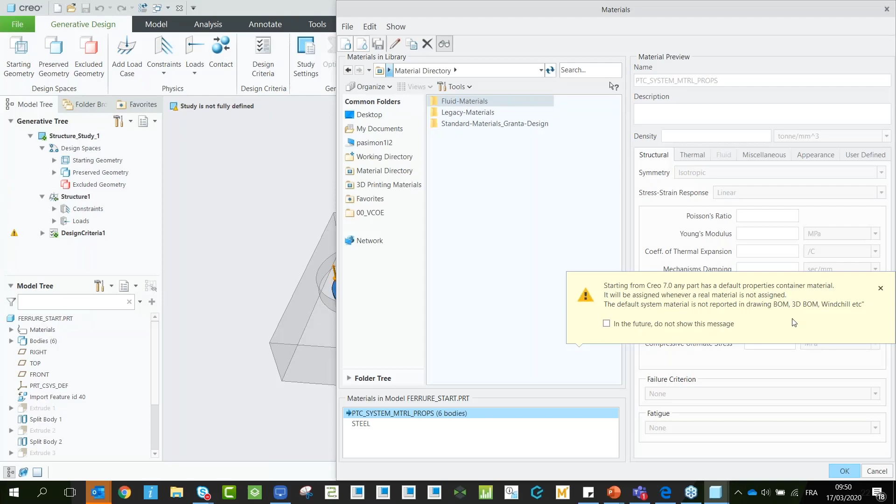But of course, it will change in the future - we are already planning some other design goals. Here is where you define your geometric constraints - if you want planar symmetry, material spreading, or manufacturing constraints, depending on how you want to manufacture this part at the end. For the sake of time, I will not add this right now, maybe if you have time we can do this later on. And I will add just my material - let's say I want steel.

So now I have my material, I have everything defined, I can start to optimize. As you can see, it's starting optimizing. What you can see here is also some information about this current simulation that's running.

So we have all design criteria, because you can define more than one. You have your materials, you have the real-time update of your mass, and then you have the number of elements that you have in the model. Depending on the number of elements, it will be fast or slow.

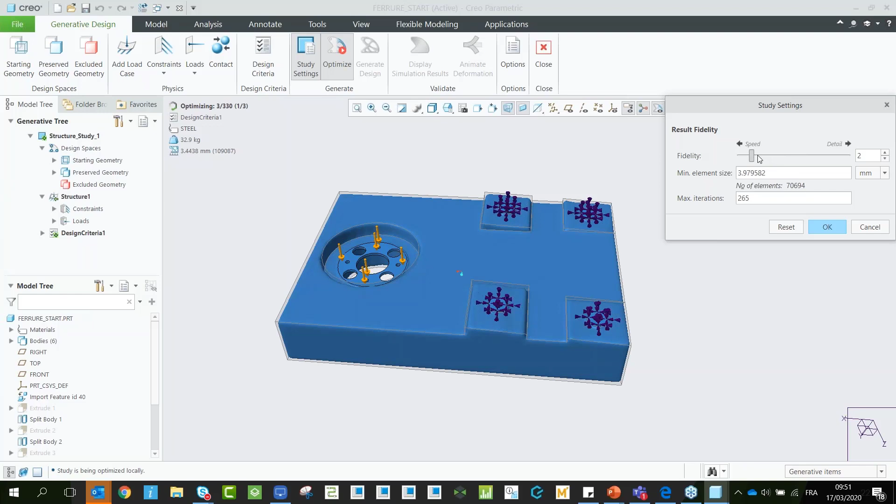In my case it's quite high, so you can play with this in the study settings. You can say you want your simulation to be quicker, or more detailed, and this will increase the number of elements in your model. In my case it's 5, so it can take a long time, so I will reduce this for the sake of presentation. Start it again. Of course the geometry will be less sexy, but for this demonstration it's perfect, so it will be a bit quicker.

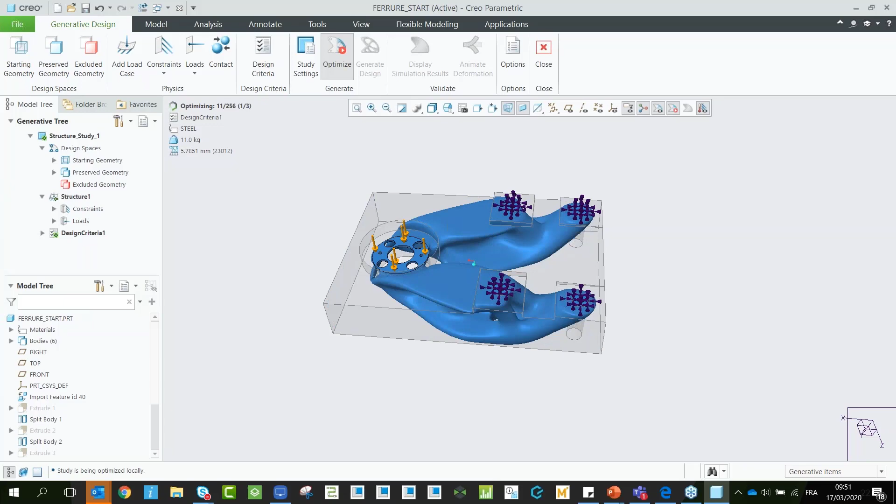So what you can see is a real-time update on the geometry.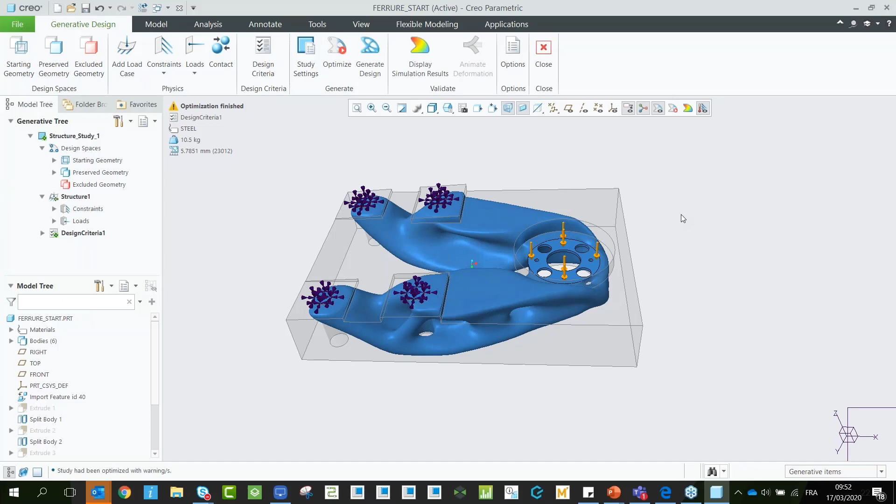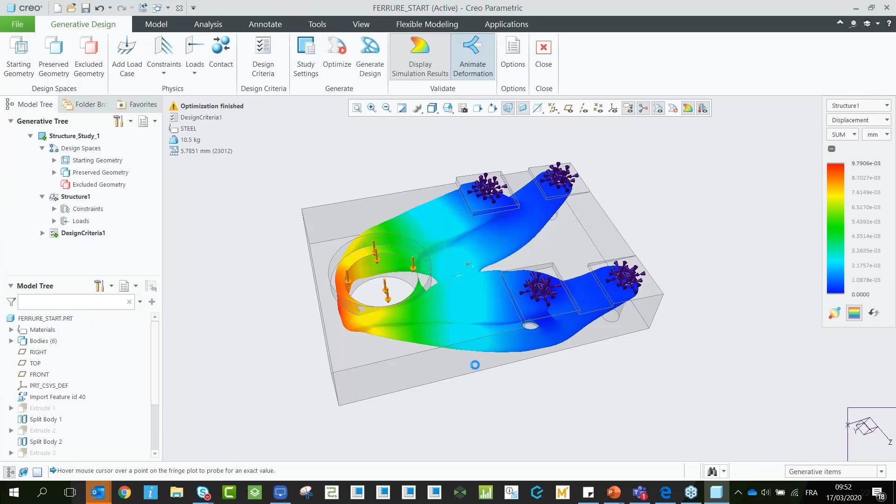With Creo Simulation Live we are actually using the graphics card, the GPU is working on Creo Simulation Live. This technology we also use for generative design. So when we do generative design on the computer, standalone at home or at our office, we will utilize the NVIDIA graphics card to calculate this. So generative design and Creo Simulation Live are turning your computer into a parallel processing machine with two CPUs, one in the graphics card and one in the computer, and they're both working in parallel.

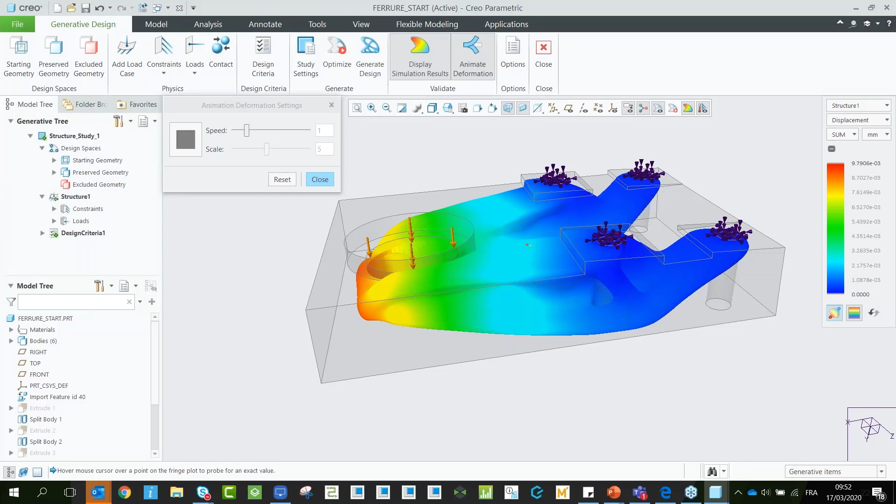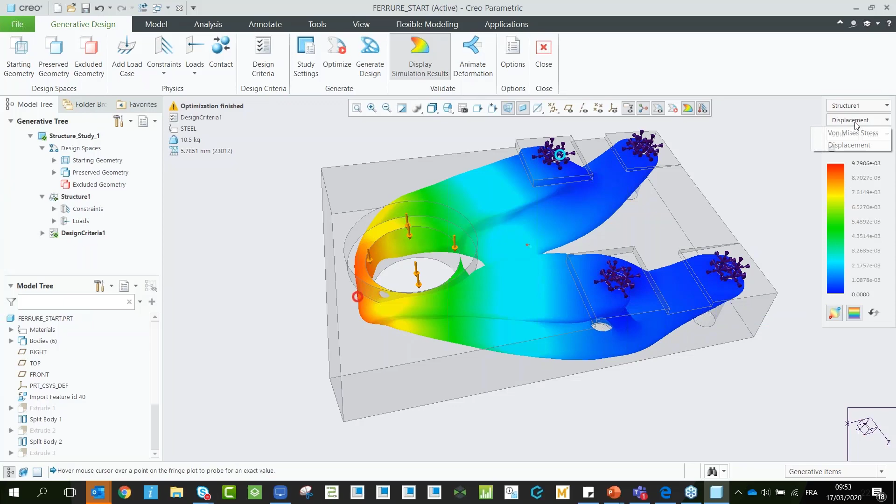Okay, so just to finish with this, you can see the results. You can see the maximum, in this case it's displacement that I'm looking at, and the minimum here. You can animate the deformation, and you can visit different areas, for example if I click on this you can see the constraint here and so on.

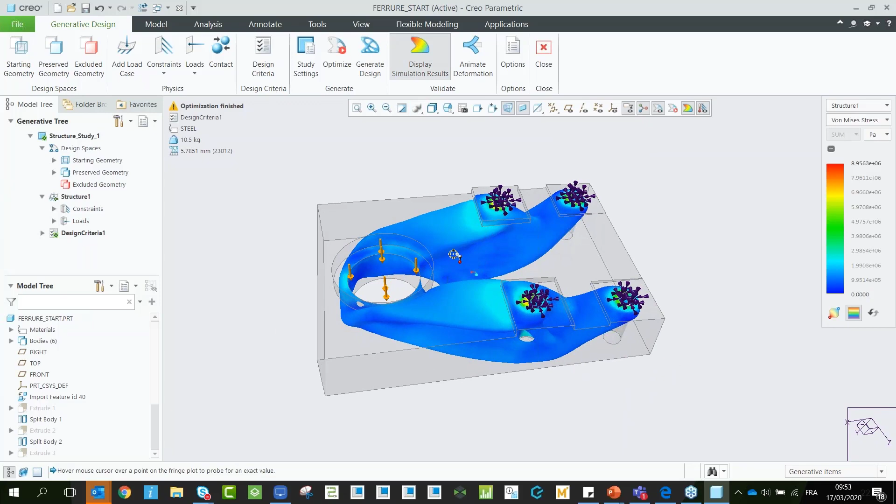And of course you can regenerate the model. I will not do it here because it takes a bit of time, but you can regenerate this model, and then you can send this to Creo Simulation Live, or do any downstream activities with this B-rep geometry, because it's creating you a B-rep geometry with this. Do you have any questions on this?

No new questions have come in, but I think we have to watch the time by now. Yeah, it's done for me. If you're ready, I can start answering the questions.

Thank you for the presentation and for this unannounced first run of Creo 7 live demonstration. I'm pleased to see that is possible and allowed. So everybody should be happy that they've got a first view of Creo 7 also.

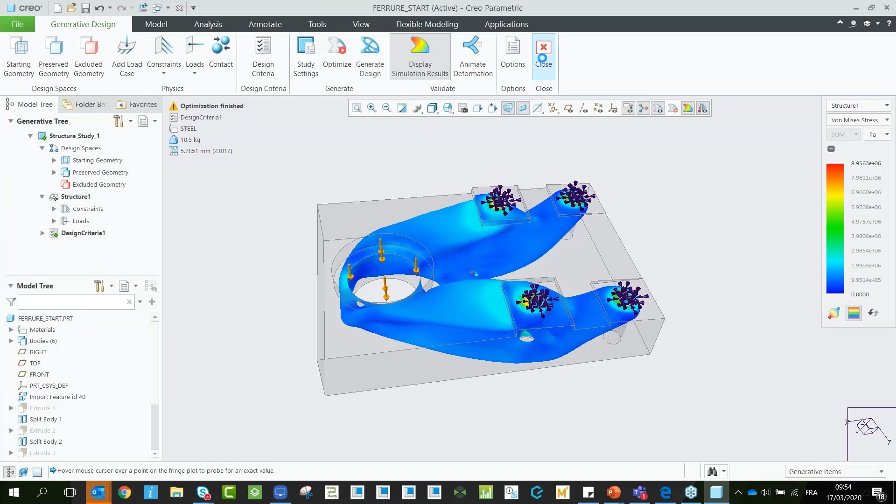Lots of new exciting technologies, and one of the things I think is very much in focus for the future, where we will need to reproduce spare parts using additive manufacturing, is the link to Windchill, which will ensure that we can produce exactly the same parts for replacement as was originally in the machine we are replacing parts in. So that's also a good point which should set us apart from the competition.